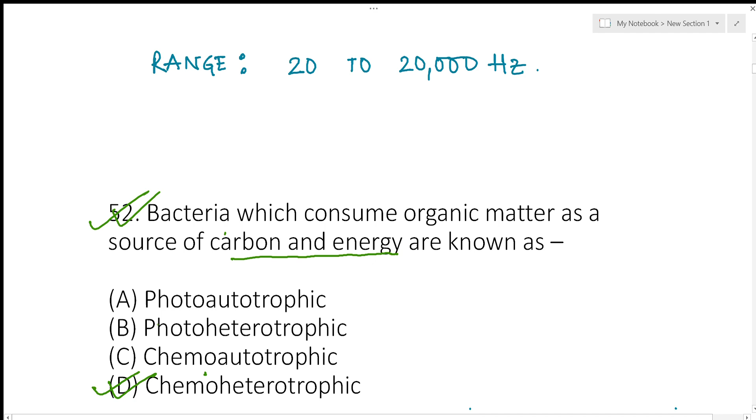Now, the bacteria which consume organic matter as a source of carbon and energy are known as chemoheterotrophic bacteria. Let us look at all the options here. What are photoautotrophic organisms? Photo refers to from light, and photoautotrophic organisms refer to those organisms that can derive energy from light and synthesize organic compounds from carbon dioxide. Now what is photoheterotrophic? These are organisms that use light to generate energy but cannot use carbon dioxide as their sole carbon source; they require organic carbon as a carbon source.

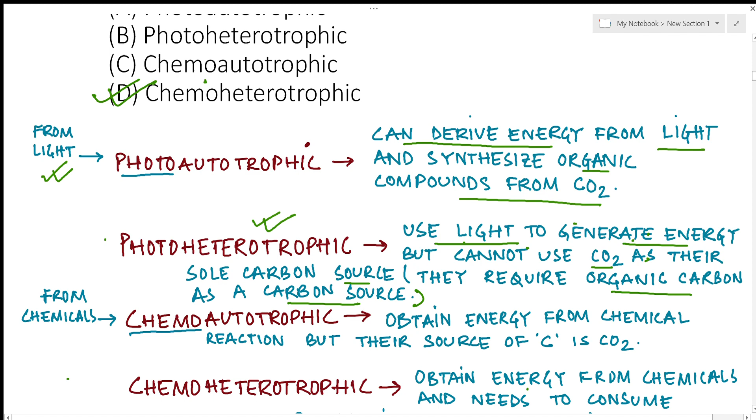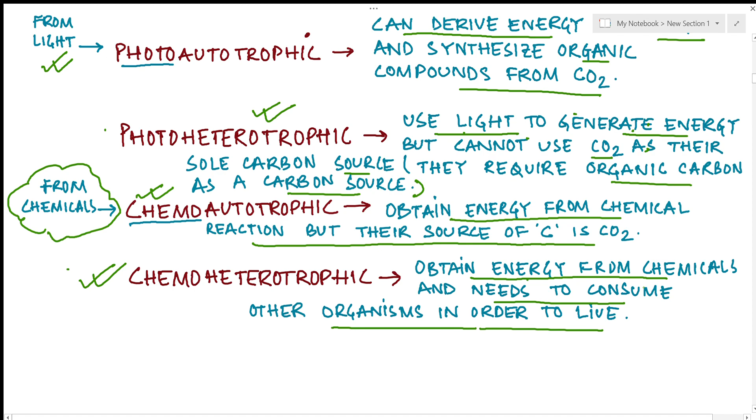Now let's look into chemoautotrophic bacteria. Chemo refers to from chemicals. These organisms obtain energy from chemical reactions, but their source of carbon is carbon dioxide. In cases of chemoheterotrophic microorganisms, these obtain energy from chemicals and need to consume other organisms in order to live. So the answer for this particular question should be chemoheterotrophic bacteria.

Next question: deep foundations are normally defined as. There are two schools of thought, according to Terzaghi and according to Skempton. Shallow foundations are defined as where the depth to width ratio is less than or equal to 1, and according to Skempton the same value is less than or equal to 2.5. In cases of deep foundation, which is asked here, the depth to width ratio is greater than 1 in case of Terzaghi, and in case of Skempton it is greater than 2.5.

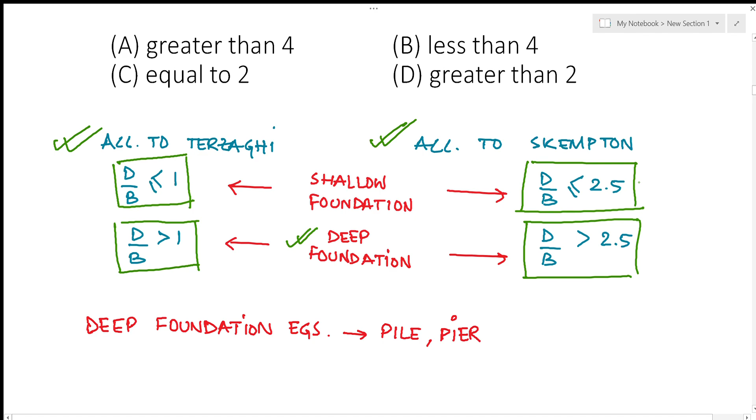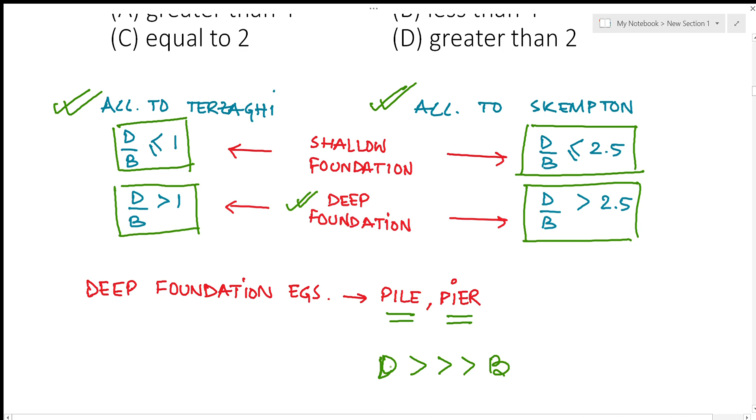But as you can see, the options don't relate to these theories as such. In general, examples of deep foundations are pile foundations and pier foundations, where the depth of foundation is much greater than the width of foundation. In this option you can choose the one which is greater than 4. Deep foundations are normally defined as those that have depth to width ratios greater than 4.

But if they mention in the question, like if deep foundations are normally defined according to Terzaghi, where the depth to width ratio, then you can use those particular options. And if they mention according to Skempton, you can use those options. But if they ask in general and the options are like this, the best option according to me is greater than 4. So you need to answer according to the options given.

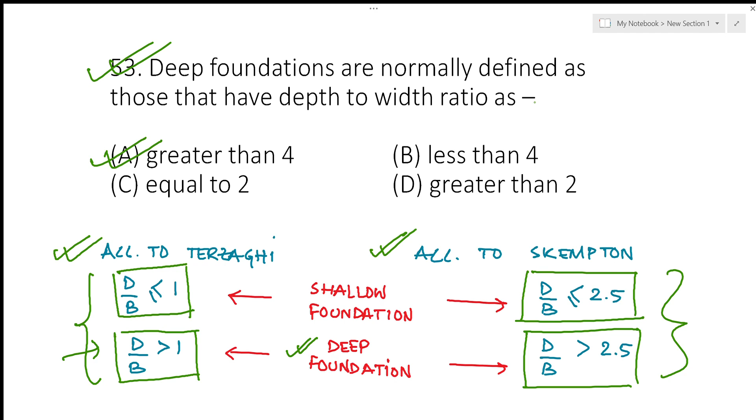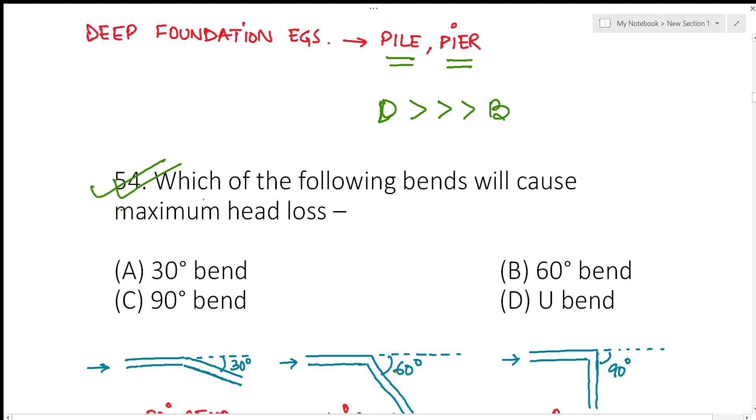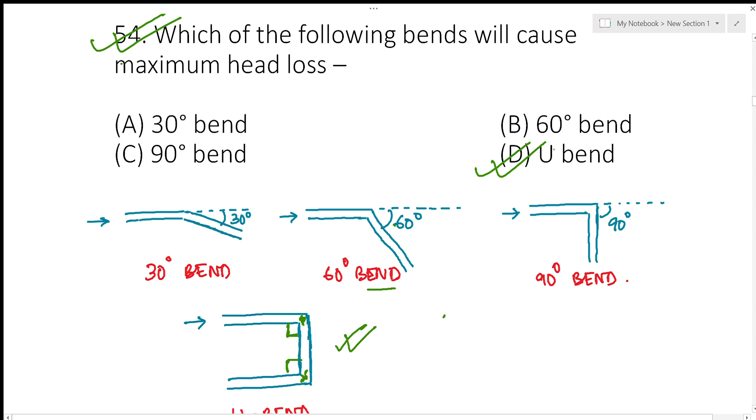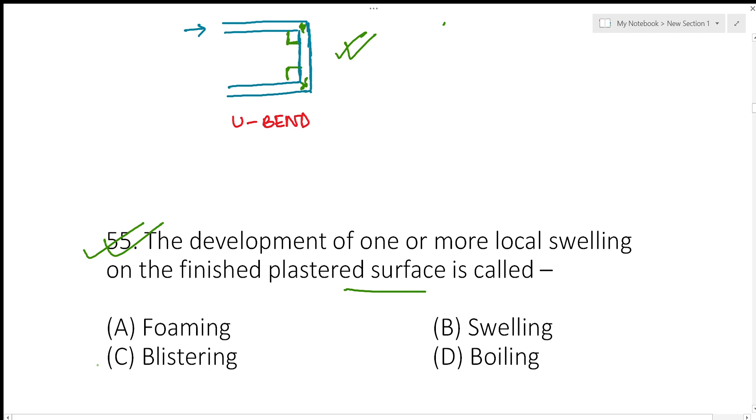Next question: the development of one or more local swellings on a finished plaster surface is called. The answer is blistering. The development of one or more local swelling on the finished plaster surface is called blistering.

The next question: the property of steel is influenced maximum by. You know the answer, it is carbon. The property of steel is influenced maximum by carbon. If you increase the carbon content in steel, it increases the strength and hardness, and also if you increase the carbon content, the brittleness also increases.

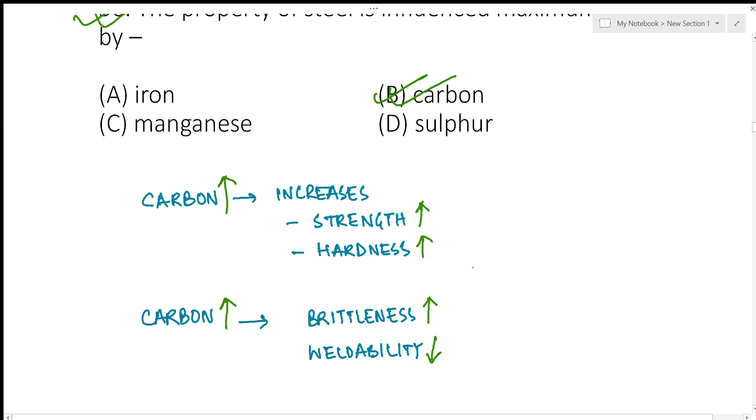Therefore, the ductility decreases and the weldability decreases. So if you increase the carbon content, these are the following changes that happen in the properties of steel.

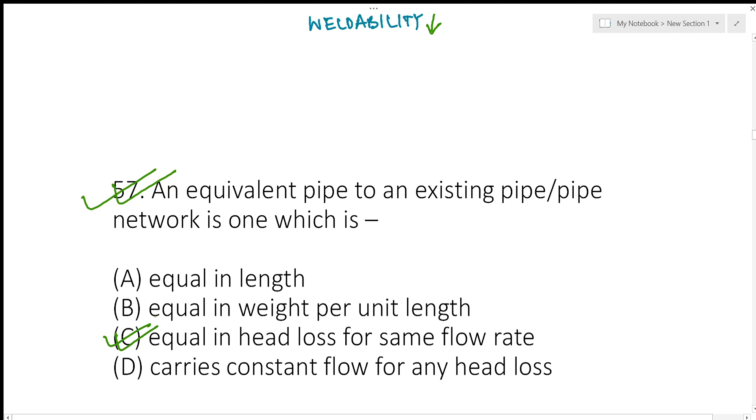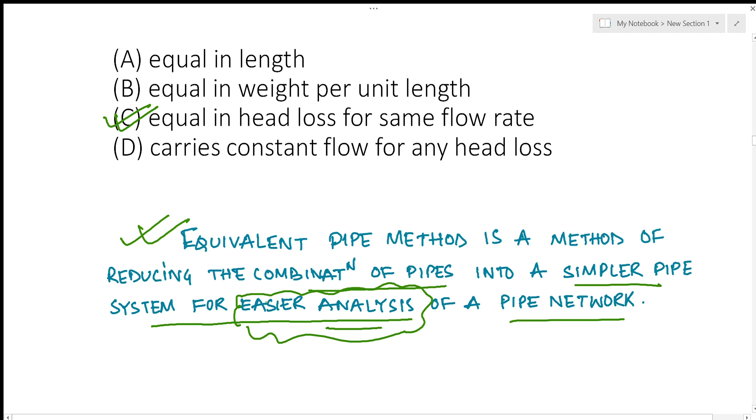Next question: an equivalent pipe to an existing pipe or pipe network is one which is equal in head loss for the same flow rate. The equivalent pipe method is a method of reducing a combination of pipes into a simpler pipe system for easier analysis of a pipe network. So the answer for this particular question should be C, equal in head loss for same flow rate.

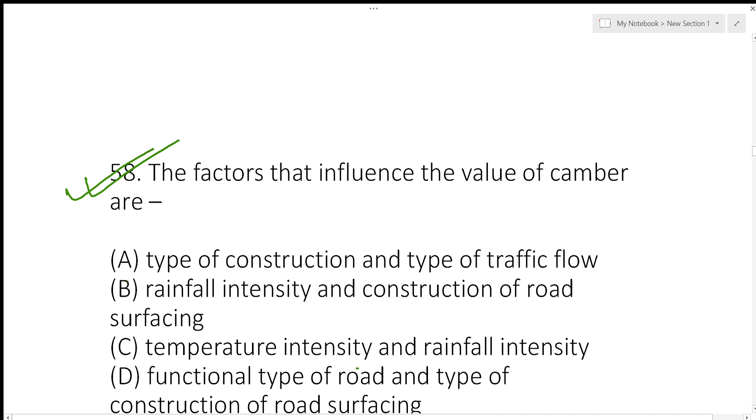The next question is the factors that influence the value of camber. Now you know the important factors that actually influence the value of camber: it is the rainfall intensity and the construction of road surfacing. The camber as per IRC depends upon rainfall, as you already know. There are two types of rainfall, heavy rainfall and light rainfall, and the value of camber varies according to these two parameters as well as the road surface.

So in cases of cement concrete or high bituminous type, for heavy rainfall it is 2% and for light rainfall it is 1.7%. For thin bituminous type it is 2.5% for heavy rainfall and 2% for light rainfall. For waterbound macadam roads or gravel roads, it is 3% for heavy rainfall and 2.5% for light rainfall. And for earth roads, it is 4% and 3% respectively for heavy and light rainfall.

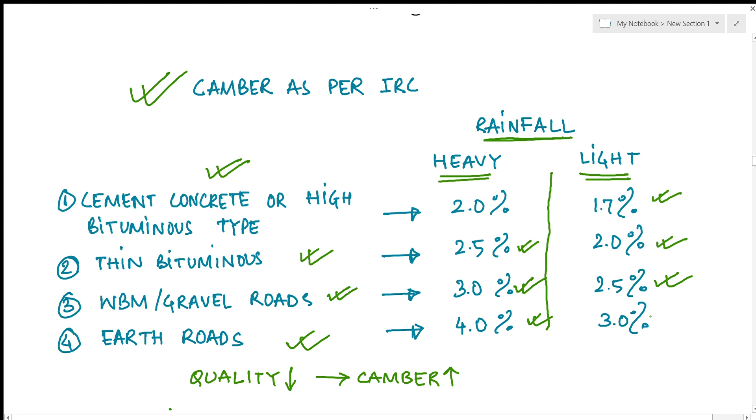You would notice here that if the quality of road surface decreases, then the camber value increases. Of course, you need to have a higher camber value if the quality of road surfacing is less, so that water does not percolate into the pavements and deteriorate the quality of roads.

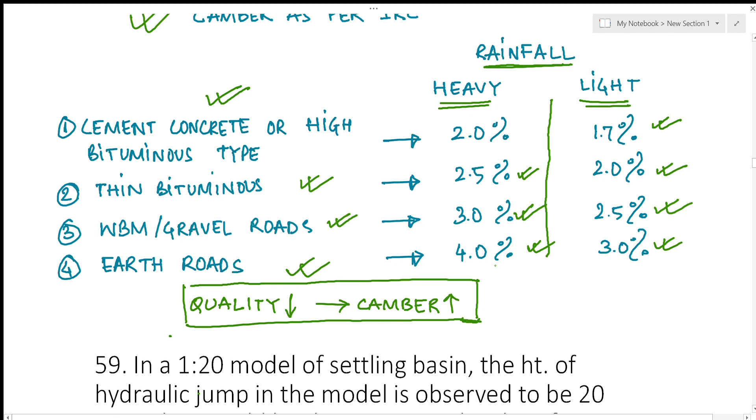The next question is, in a 1:20 model of a settling basin, the height of hydraulic jump in the model is observed to be 20 centimeters. What would be the corresponding height of jump of the prototype?

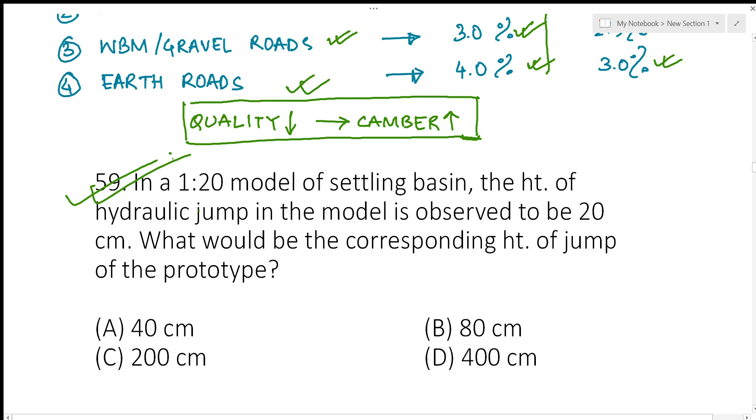Now you know the scale ratio is given by LR, which is equal to length of model by length of prototype, or the height of model by height of prototype, or the width of model by width of prototype, which is given by the geometric similarity.

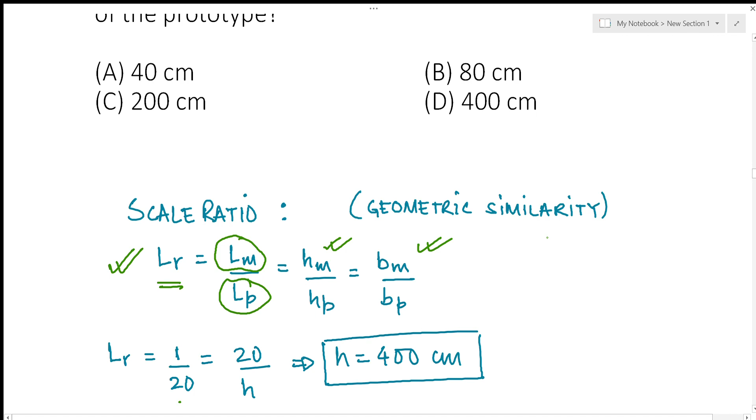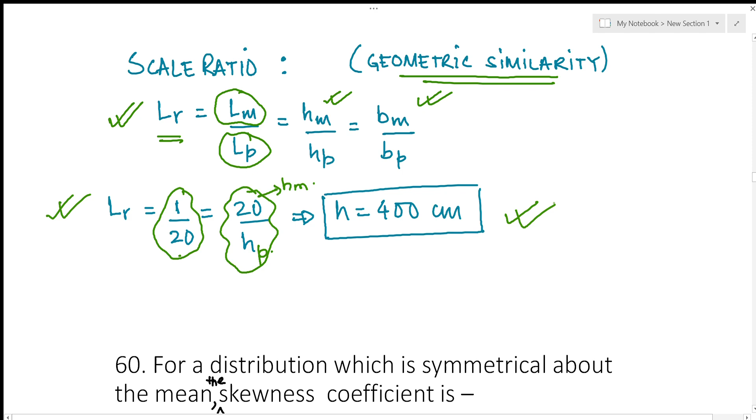Now here the length ratio is given as 1:20, and you just need to replace these parameters: this is the height of jump of the model and this is the height of jump of the prototype. So you just need to replace the values and you would get the answer as 400 centimeters. The answer for this particular question should be 400 centimeters.

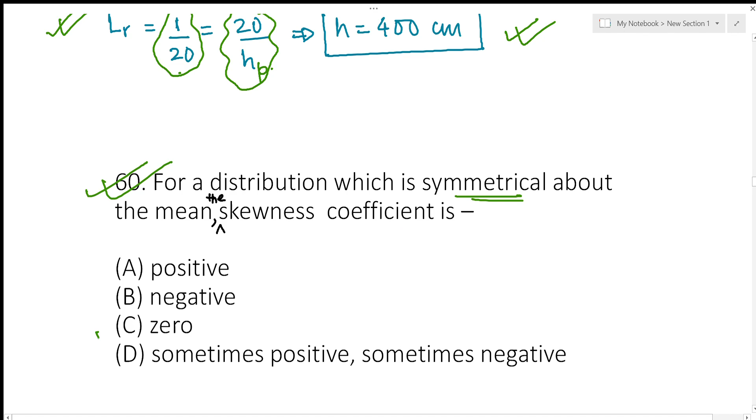The next question is, for a distribution which is symmetrical about the mean, the skewness coefficient is. Now for a distribution which is symmetrical, the skewness coefficient should be 0. You know for symmetrical distribution, it is also known as a bell curve or normal distribution curve. For these curves, the skewness coefficient is always 0.

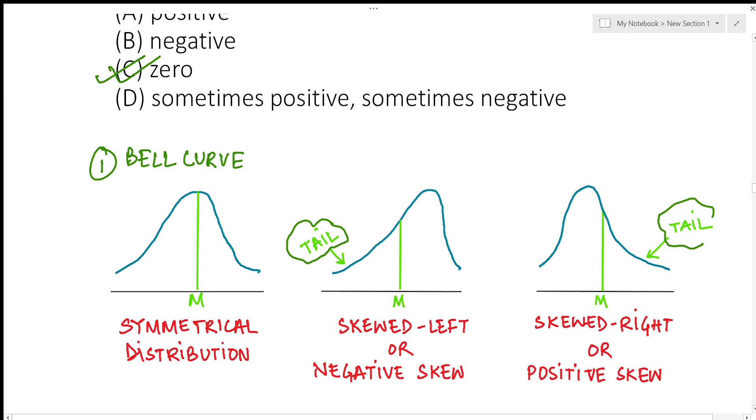And for skewed left or negative skew, how would you understand if it's a skewed left or negative skew curve? If the tail is on the left hand side of the mean, then it is known as skewed left or negative skew. If the tail is on the right side of the mean, it is known as skewed right or positive skew. So you have to answer accordingly if a different question comes.

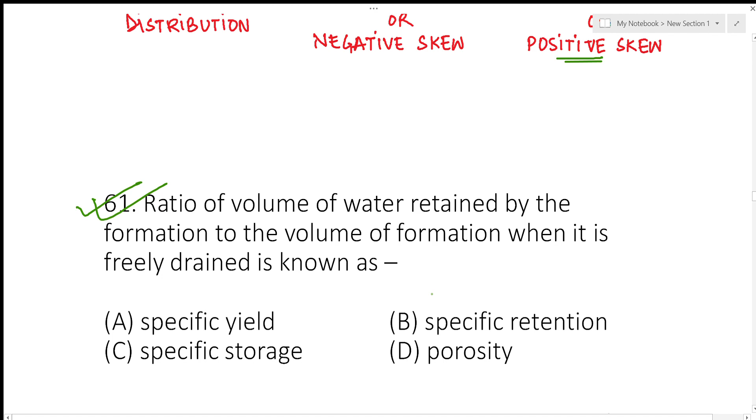Next question is, ratio of volume of water retained by the formation to the volume of formation when it is freely drained is known as. Now the answer is specific retention. Also specific yield is given by volume of water drained by gravity drainage divided by total volume.

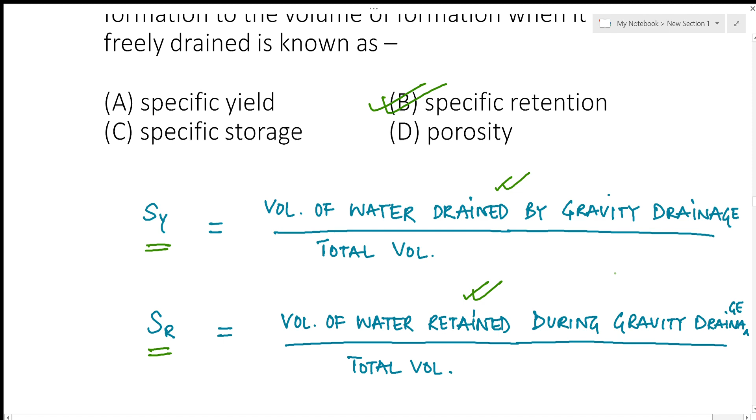And the specific retention is given by volume of water retained during gravity drainage by total volume. Also, if you add these two values, specific yield and specific retention, it will give you the porosity. This also comes in the examination.

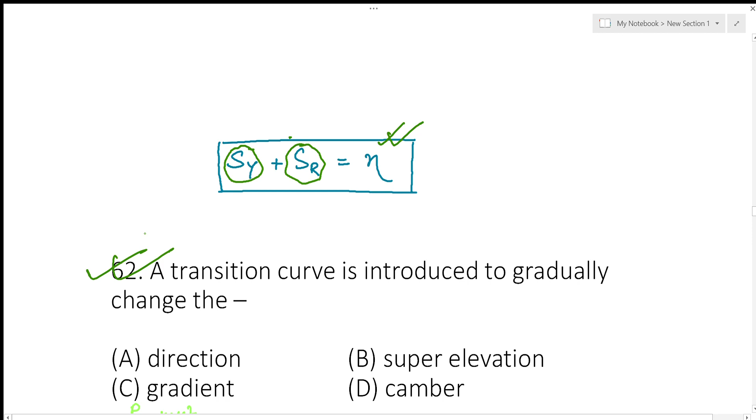Now, a transition curve is introduced to gradually change the... Now, a transition curve is introduced to gradually change a lot of things. Most important is to change the super elevation, to change the super elevation.

Let's look into a transition curve. Now, transition curves are used to change the alignment from straight to a circular portion. In the straight portion, the radius is infinity, so there is no centrifugal force in the straight portion.

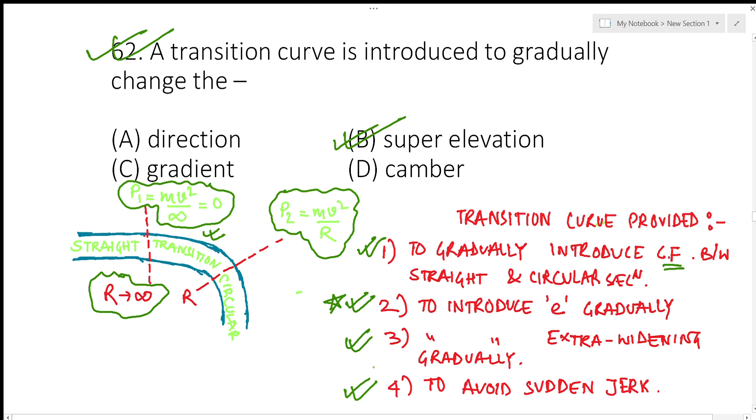When it comes to the circular portion, a centrifugal force comes into play with a radius r. So in order to gradually introduce the centrifugal force, we introduce a transition curve between the straight and circular section. Also, transition curves introduce the super elevation gradually - this is the most important feature. They also help introduce the extra widening gradually, and avoid sudden jerk. These are the points related to transition curves that might be asked in the exam.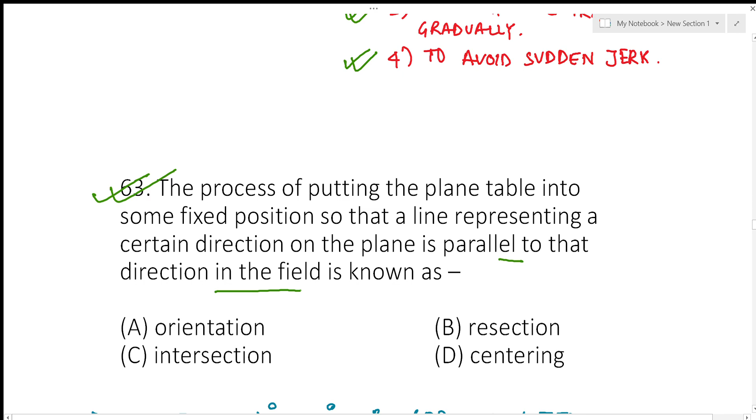Next question: the process of putting the plane table into a fixed position so that a line representing a certain direction on the plane is parallel to that direction in the field is known as? The answer is orientation.

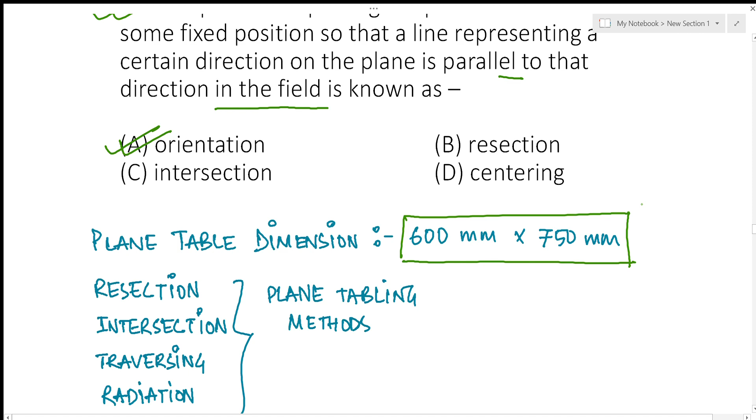Also, the plane table dimension is 600 millimeter by 750 millimeter. This is also asked in a lot of examinations. And also resection, intersection, traversing, and radiation - these are all plane tabling methods.

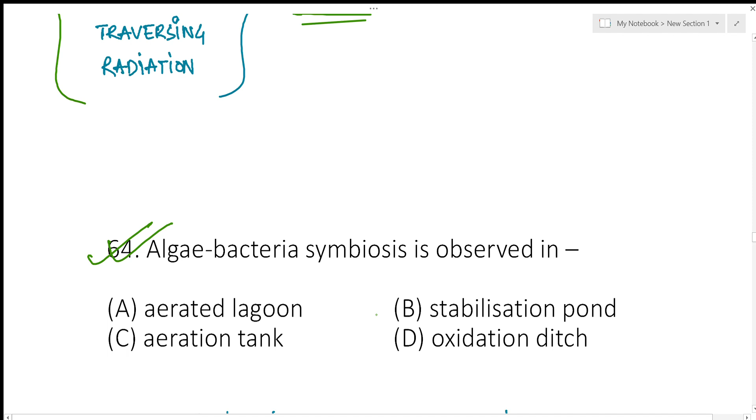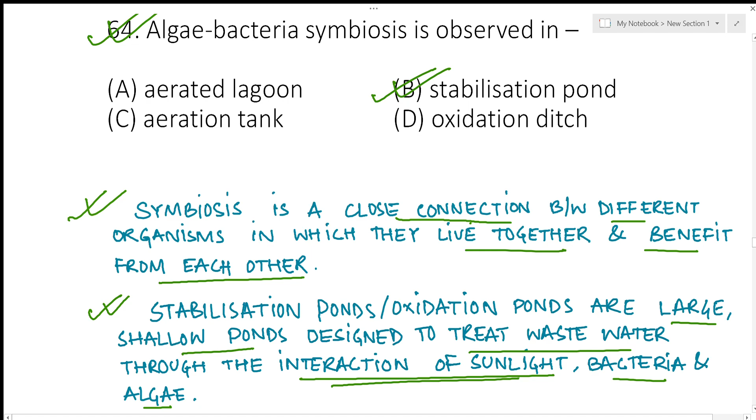Next question: algae bacteria symbiosis is observed in stabilization ponds or oxidation ponds. Now, symbiosis is a close connection between different organisms in which they live together and benefit from each other. Stabilization ponds or oxidation ponds are large, shallow ponds designed to treat wastewater through the interaction of sunlight, bacteria, and algae.

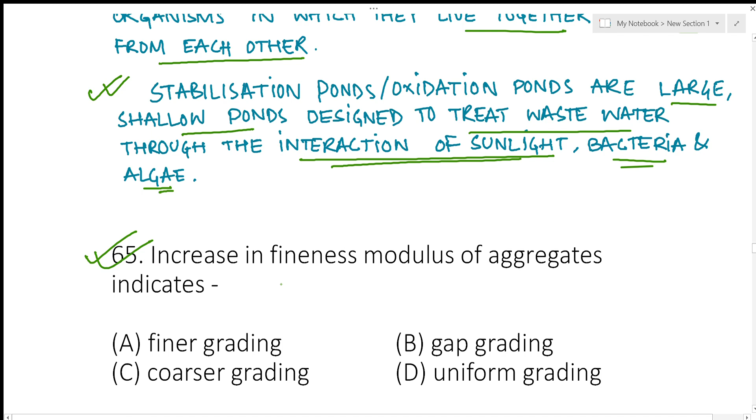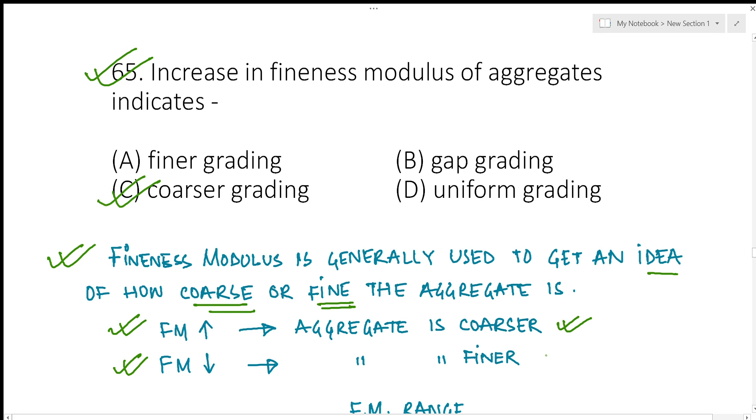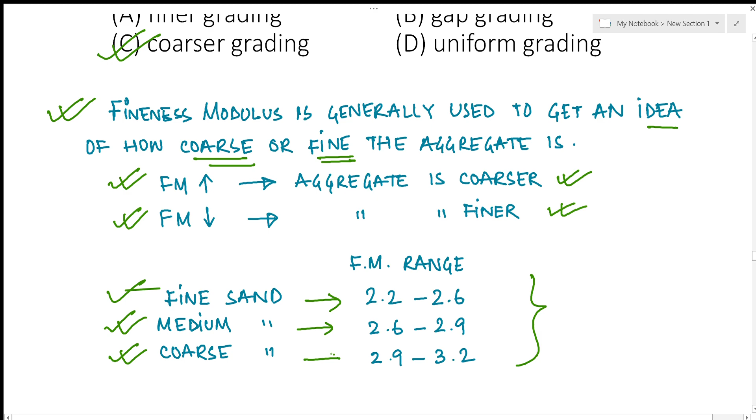Next question: increase in fineness modulus of aggregates indicates. If the fineness modulus increases, it indicates a coarser grading. Fineness modulus is generally used to give an idea of how coarse or fine the aggregate is. If the fineness modulus is more, it indicates coarser aggregates; if less, it indicates finer aggregate. Also know the range: for fine sand it is 2.2 to 2.6, for medium sand 2.6 to 2.9, and for coarse sand 2.9 to 3.2.

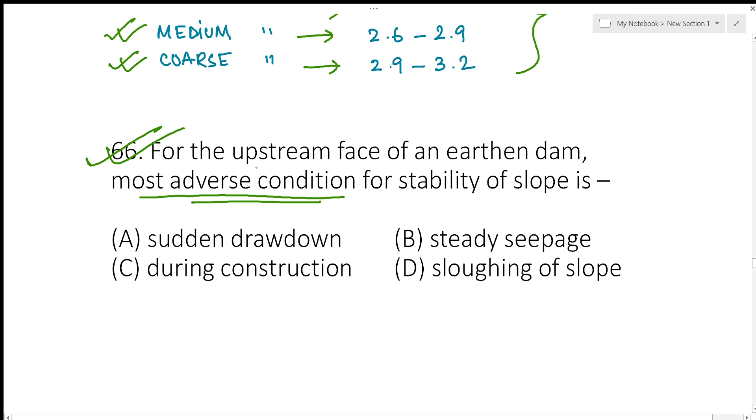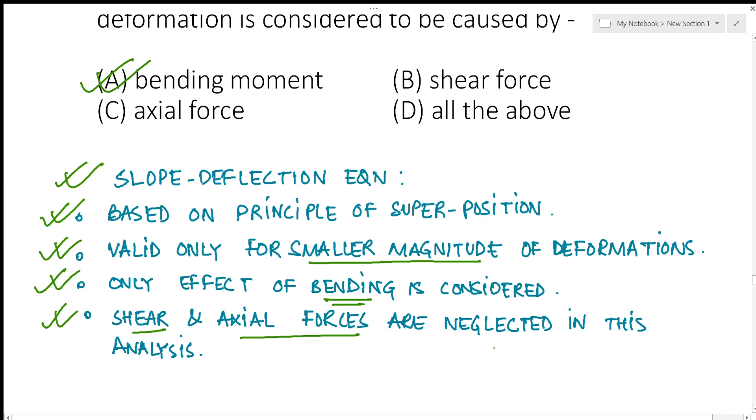Next question: in the slope deflection equation, the deformation is considered to be caused by bending moment only. Other points to know: it is based on the superposition principle, it is valid only for smaller magnitude of deformations, and only the effect of bending is considered - all shear and axial forces are neglected in this analysis. So the answer should be bending moment only.

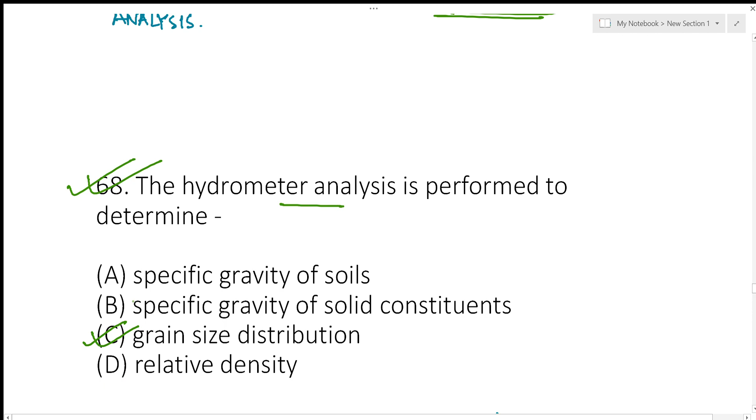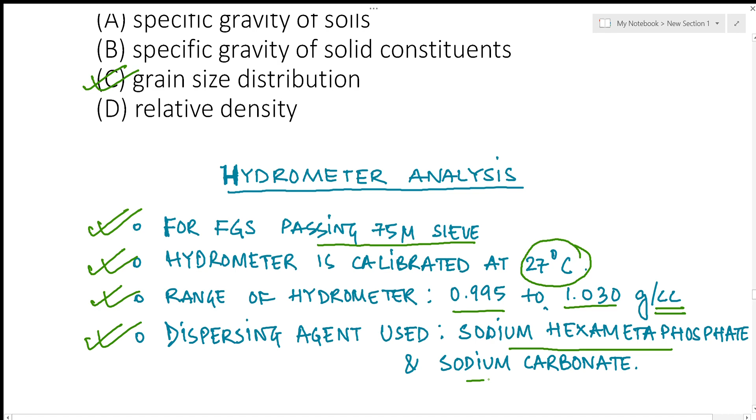Next question: the hydrometer analysis is performed to determine the grain size distribution or particle size distribution. Also remember: it is used for fine grained soil passing 75 micron sieve, the hydrometer is calibrated at 27 degrees centigrade, the range of hydrometer is from 0.995 to 1.030 gram per cc, and the dispersing agents used are sodium hexametaphosphate and sodium carbonate. These are asked in examinations.

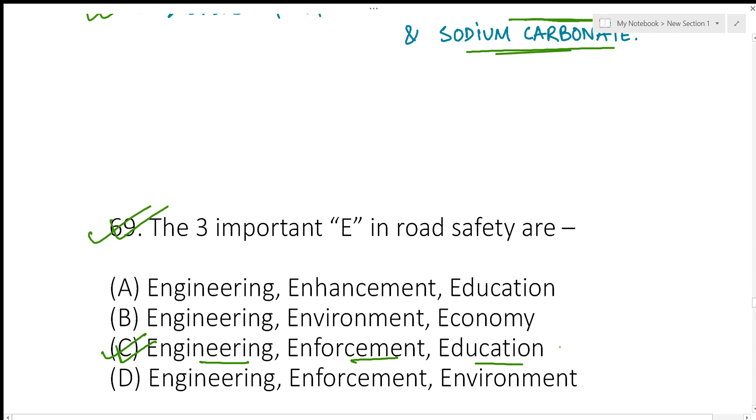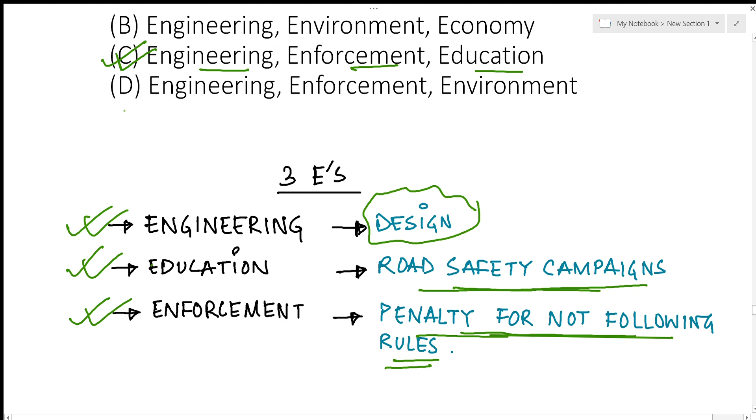Next question: the three important E's in road safety are engineering, enforcement, and education. Engineering refers to the design part. Education refers to the road safety campaigns that the government organizes. Enforcement refers to the penalty that the government charges for not following rules and for traffic violations. So these are the three E's for road safety.

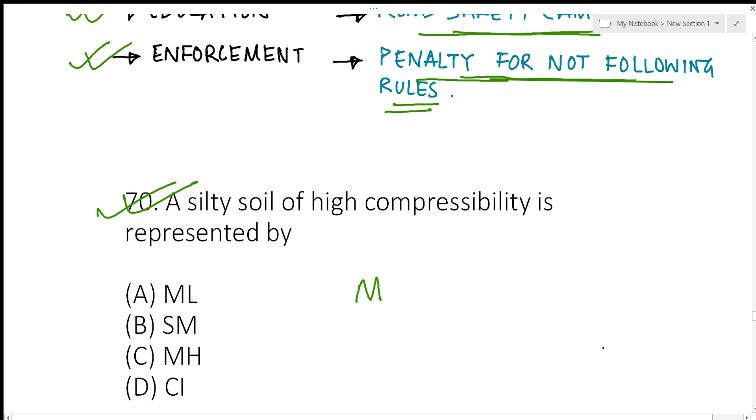The next question is: a silty soil of high compressibility is represented as. Silt refers to as M. Now, silty soil of high compressibility is represented by MH.

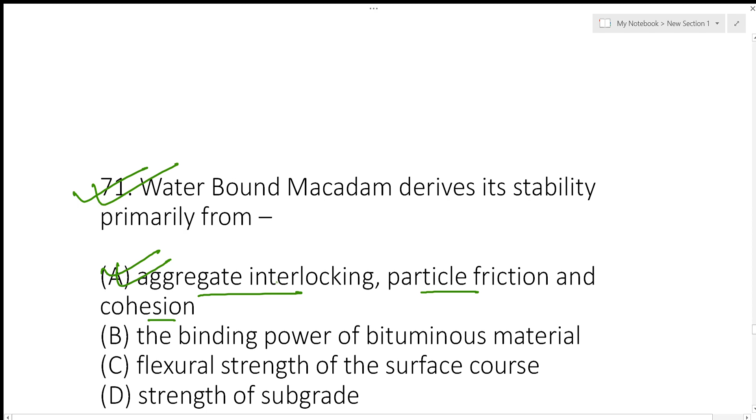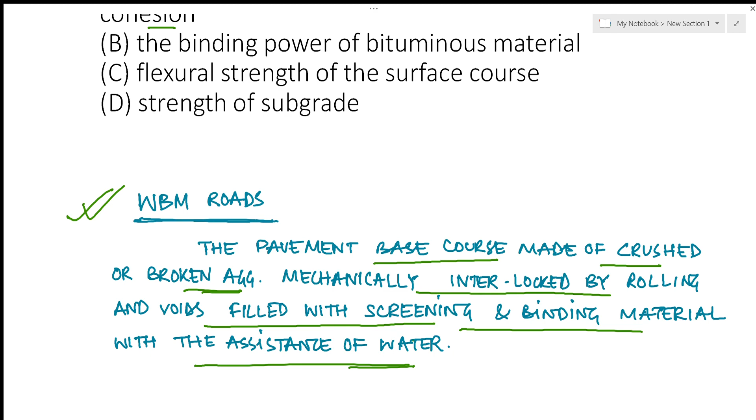Next question is: the water-bound macadam derives its stability primarily from what? The answer is aggregate interlocking, particle friction, and cohesion. In waterbound macadam roads, the pavement base course is made of crushed or broken aggregates, mechanically interlocked by rolling, and voids are filled with screening and binding material with the assistance of water.

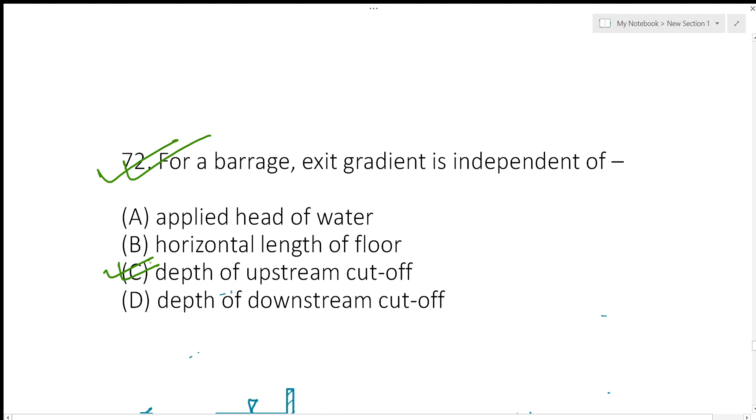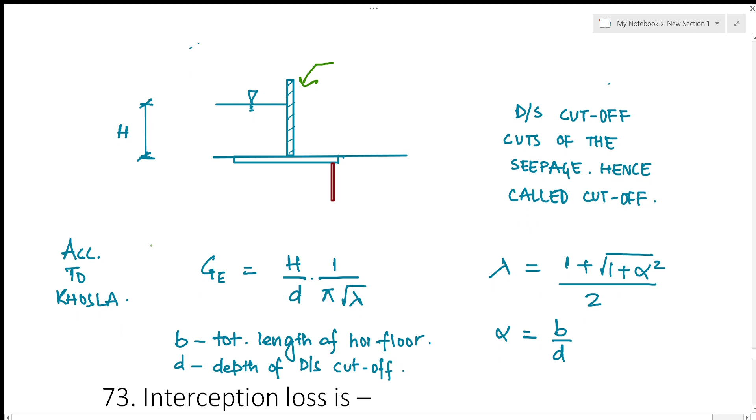Consider a barrage with a downstream cutoff and a head of water. According to Khosla, the exit gradient is given by h by d into 1 by pi root lambda, where lambda equals 1 plus root over 1 plus alpha square, by 2, and alpha is given by b by d, where b is the total length of horizontal floor and d is the depth of cutoff. The downstream cutoff cuts off the seepage, hence it is called a cutoff.

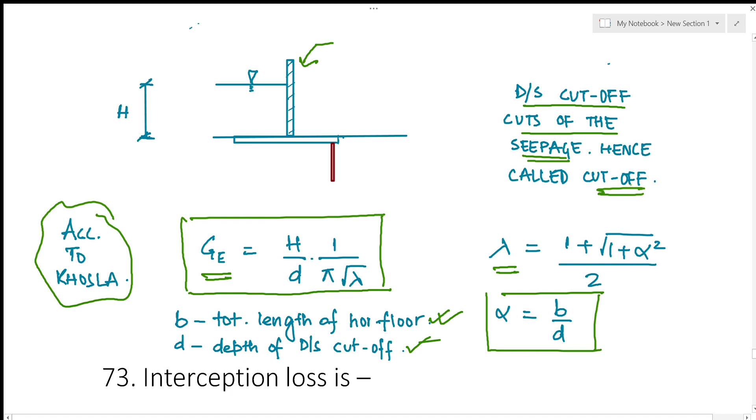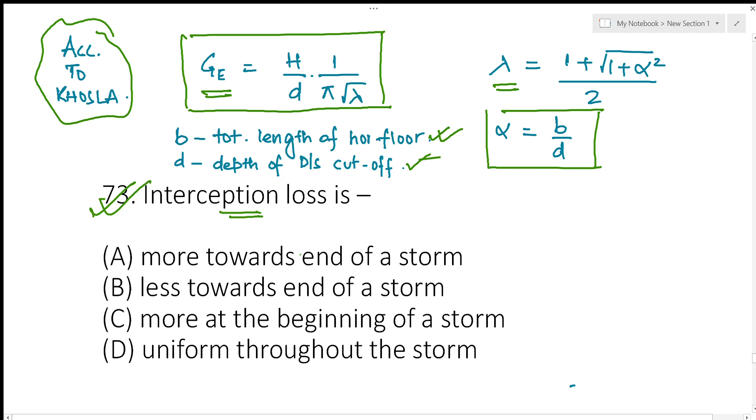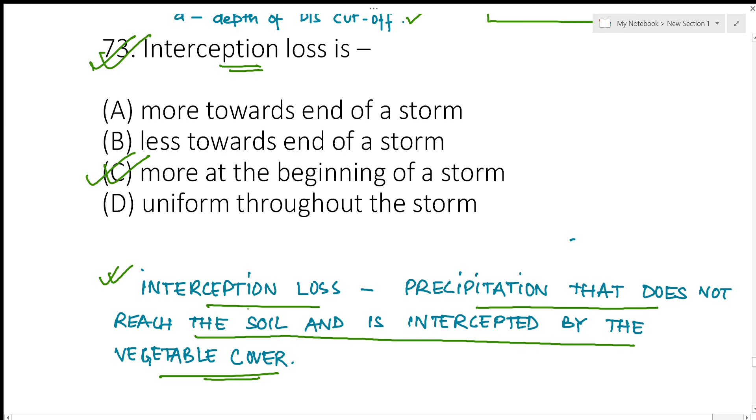Next question is: interception loss is? Interception losses are maximum towards the beginning of a storm, so the answer should be C. The precipitation that does not reach the soil and is intercepted by the vegetable cover is known as interception losses, and it is more at the beginning of a storm.

Next question: in 1 cubic meter of cement concrete at a 1:2:4 ratio mixed by volume, the number of cement bags required would be about. The ratio of cement to fine aggregates to coarse aggregates, 1:2:4, refers to M15 concrete. The dry volume of concrete is given by 1.54 times the wet volume, so the dry volume is 1.54 meter cube.

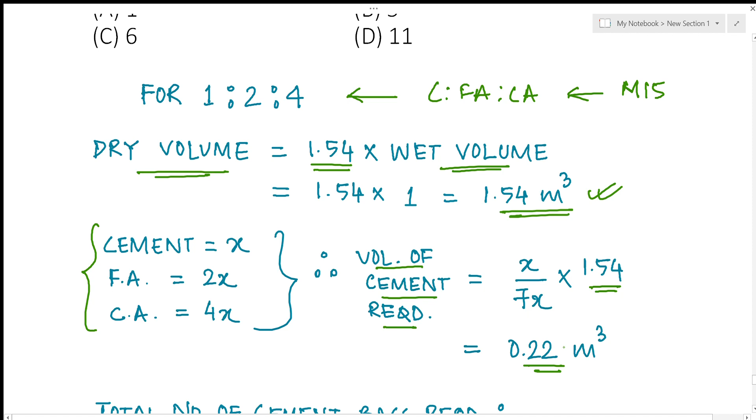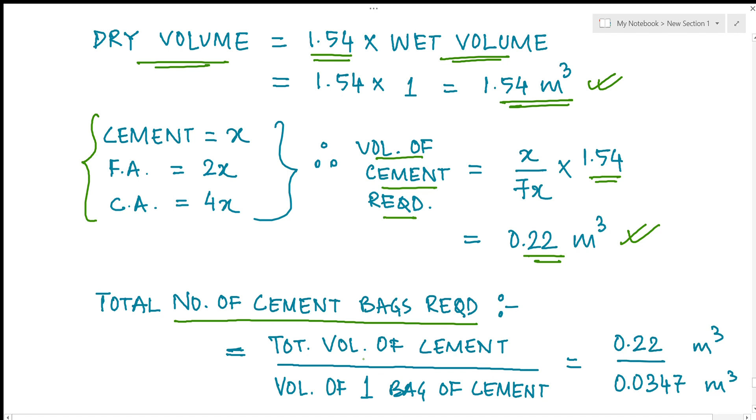The ratio of cement to fine aggregates to coarse aggregate is taken as x:2x:4x. So the volume of cement required is x by 7x into the total volume, that is 1.54, which gives 0.22 meter cube of cement. The total number of cement bags required is given by total volume of cement divided by volume of one bag of cement. The volume of one bag of cement is 0.0347 meter cube, and the total volume of cement is 0.22 meter cube, so the calculation gives 6.34.

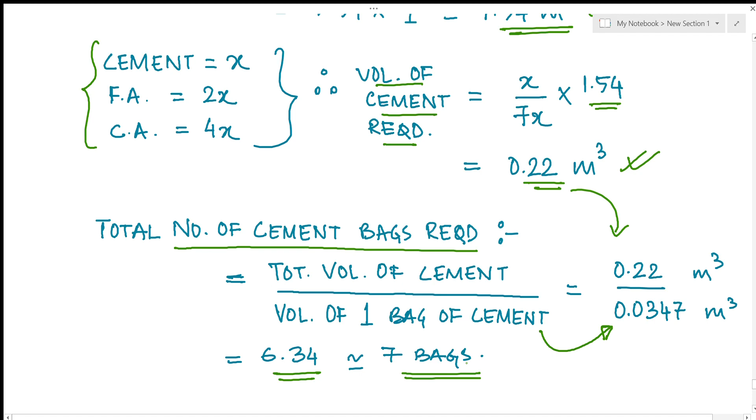So the right answer should be 7 bags of cement for this mix. If there's no option for 7, the nearest answer is 6, but if 7 is an option, the answer should be 7 bags, because you have to open the 7th bag in order to make this mix or create this volume.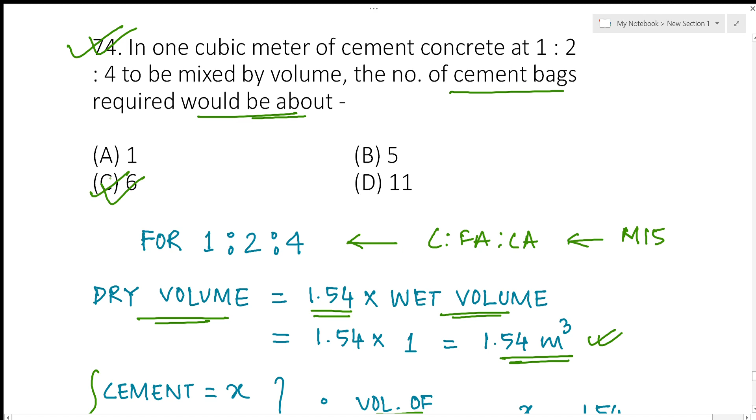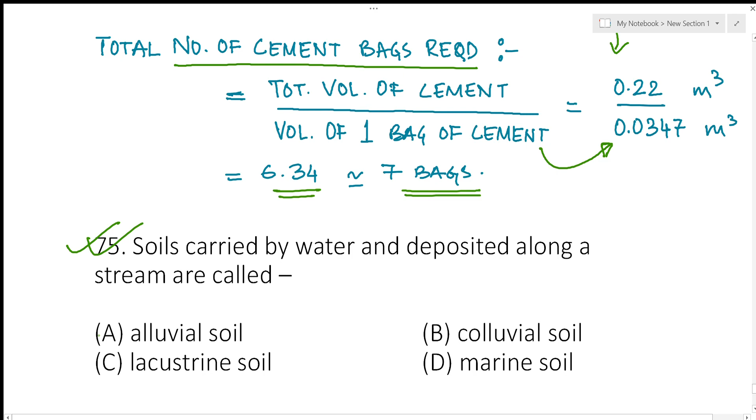Next question: soils carried by water and deposited along a stream are called alluvial soil. Other soils mentioned here are lacustrine soils. Lacustrine soils are soils carried by a river entering a lake, depositing coarser particles due to sudden decrease in velocity, while fine-grained particles move to the center of the lake and settle when the water becomes still. Just remember, soil deposits in lakes are known as lacustrine soil.

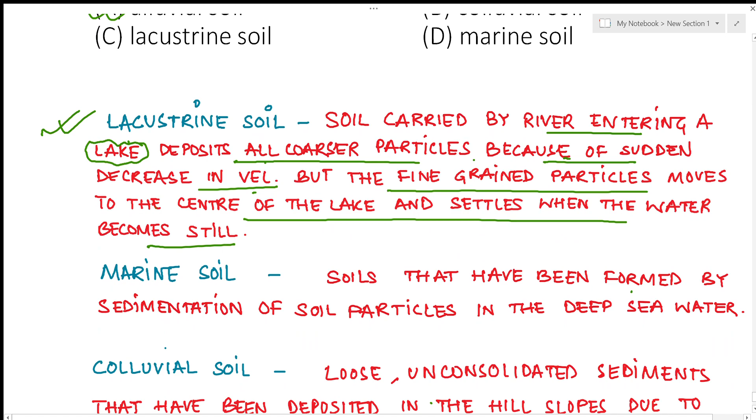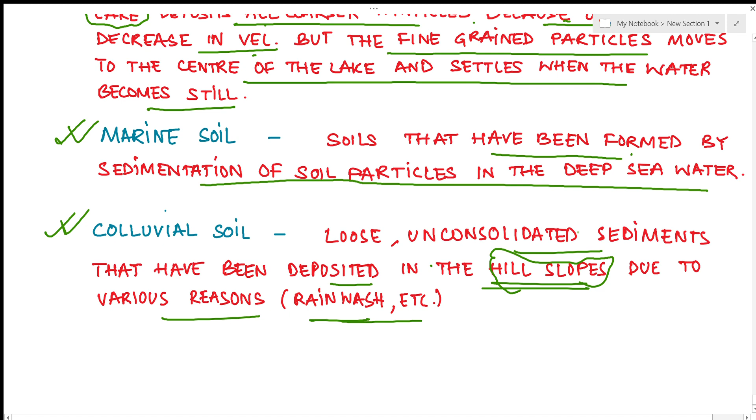Next, marine soils are soils formed by sedimentation of soil particles in deep sea water. Colluvial soils are loose, unconsolidated sediments deposited on hill slopes due to various reasons like rain wash. Just remember this and you'll know it's a colluvial soil deposit.

So the answer for this particular question should be alluvial soil. These were the 25 questions, and this was part 3 of a 4-part series of the 2012 WBPSC Assistant Engineer Civil paper. I hope this is helpful for students preparing for this exam and other similar civil engineering exams.